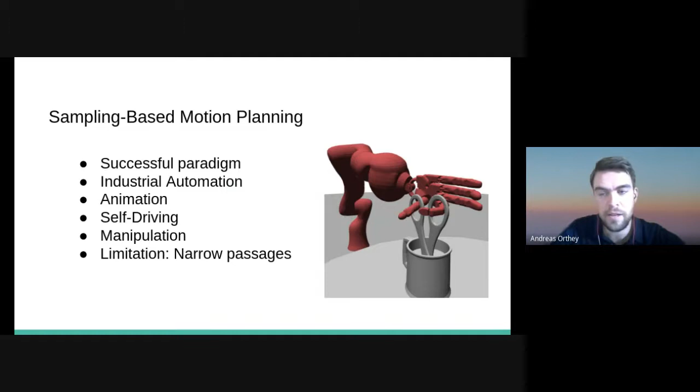However, one of the main limitations of sampling-based methods are narrow passages. Narrow passages are basically low measure regions of the state space which the robot has to move through to solve a particular problem. They are super difficult to solve for sampling-based methods because those low measure regions have, of course, a very low probability of being sampled.

Solving such narrow passage problems is hugely important in a variety of tasks like ingress or egress problems, where we need to either enter or escape from a trapped configuration. It is also important for peg-in-hole problems, where we need to fit an object through a small opening. Finally, it is also important for grasping of intricate objects, for example, when we would like to pick up something like a mug or scissors.

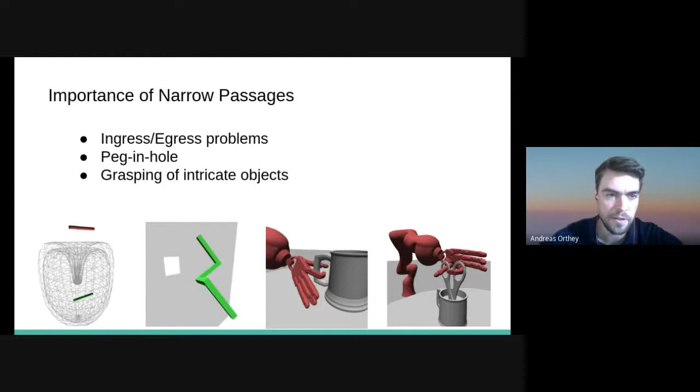In previous works, we showed that you can tackle narrow passages by first relaxing the original problem, which effectively means that we project our high-dimensional state space onto a lower-dimensional state space. We can then solve the problem on the lower-dimensional space and use that information to solve the original problem. One way to do that is by using geometric simplifications, where you, for example, simplify your robot geometry by using a sphere instead of a rigid body, or you remove some of the links from your kinematic chain.

However, while this is highly efficient and can be used to circumvent narrow passages, this approach still often breaks down near more complicated narrow passages. This effectively means that even if you have solved a simplified problem, due to narrow passages you still might not solve the original problem.

To tackle this problem, we devised new tools, which we collectively call section patterns. On a high level, section patterns constitute a mapping which tries to lift a low-dimensional path into a high-dimensional space. This is shown in this graphic, where we depict on the top a high-dimensional space represented by the cylinder, and below a disk representing a lower-dimensional space. Once we solve the lower-dimensional problem, we get a solution path, shown here in green. Our contribution is to lift this path using section patterns into the high-dimensional space.

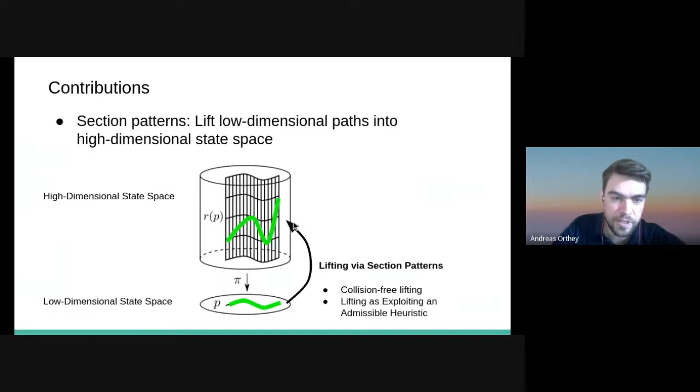This lifting is robust and efficient, and it happens while avoiding collisions and by exploiting the admissible heuristic from the lower-dimensional path. Because this is very important, I will state it again: we see this lifting operation as exploiting admissible heuristics in a continuous domain.

To recall, an admissible heuristic is a lower bound on the cost-to-go to reach a goal region. This means if you solve the problem on a lower-dimensional space, it provides you with an informed lower bound, which we can exploit to efficiently solve the original problem in the high-dimensional state space, which basically means to lift your solution path.

And if we go into the related work, we basically can exploit all the nice literature on admissible heuristics. So the question becomes how you can exploit admissible heuristics, especially in continuous domains. And there are, of course, different tools and techniques. For example, you can use discretization techniques to directly apply optimal algorithms like A star.

You can also use adaptive sampling to either increase or decrease the chance of extending a sample in your search tree. And finally, there are also continuous domain adaptations of A star. And our work is rather complementary in that we concentrate on path heuristics, which are basically an important subclass of heuristics. And concerning those path heuristics, there are actually several important papers on this topic.

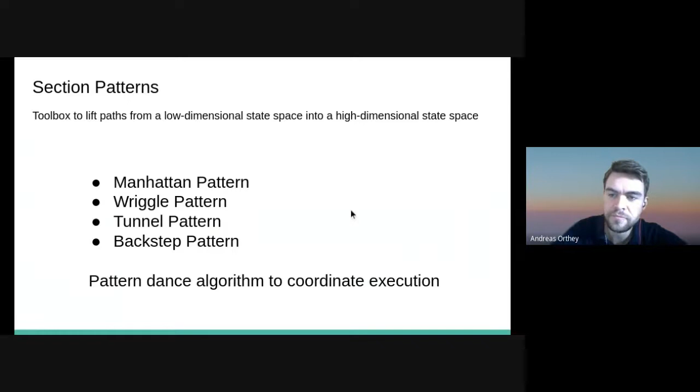With the Manhattan pattern, we interpolate a high-dimensional path, but we do that by actuating the least amount of joints during interpolation. And the reasoning here is, of course, that less joint actuation means less movement of the robot body, and less movement of the robot body in turn means less swept volume of the robot during execution, and a lower swept volume means directly that we have less chances for finding collisions. And this chain of reasoning was basically first expressed by a nice paper from Cortes in 2008.

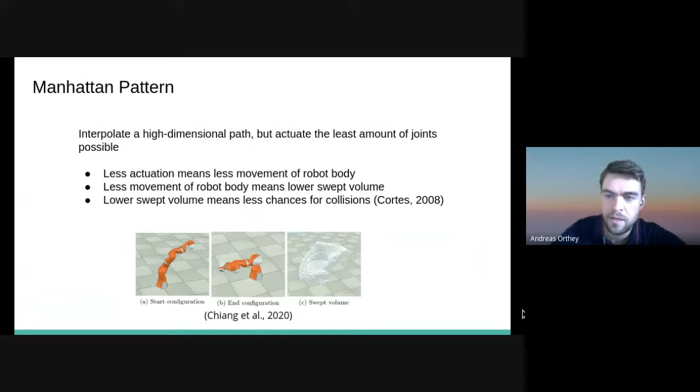And the second pattern is the wriggle pattern, where we basically do coordinated random walk steps to improve our path locally. The motivation for this pattern comes, of course, from the way we often try to open, for example, a door by just trying to wriggle the key forward. And the wriggle pattern is basically our attempt to formalize this motion primitive in a more mathematical way.

And very similar to this wriggle pattern is the tunnel pattern, where we do not do a wriggle motion, but we execute a small sidestep motion, which basically means that we move the keys sideways. And when we visualize this in joint space, we often see that this actually helps us to circumvent small infeasible regions.

And finally, we have the backstep pattern, which we only execute when we are fairly certain that we are trapped in a dead end. An example would be a dog with a stick, which cannot move through a tight opening because the stick is blocking the way forward, as you can see here on the left. And here the dog would have to make this cognitive leap of stepping back, turning, and then trying it again, like on the second video here. And we model this motion again mathematically, which allows us to make a coordinated back step to actually move forward.

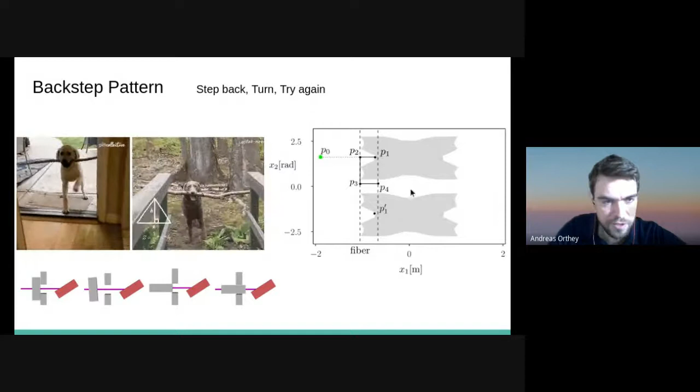And this is just something which works pretty well due to the nature of narrow passages, which often actually have small cavities in state space, which we have to escape from. And this is visible, for example, on the right, which shows a slice through the configuration space of a small rectangular robot near a narrow passage, which is shown here on the bottom of the page. And this figure here on the right shows several cavities in which we could actually get stuck when we move forward, and this backstep pattern helps us to actually avoid that.

And finally, we of course need an algorithm which can coordinate all those patterns in a meaningful way. And for that, we developed the pattern dance algorithm, which basically starts applying the least computationally demanding pattern. And if that doesn't work, it would successively try out more and more demanding patterns until we find a feasible lifting or until we reach a termination criterion.

So in super simplified pseudocode, this would basically be a loop in which we check if one of the patterns successfully solves the problem. And so we basically just iterate over all of them, and we terminate once the termination criterion is reached.

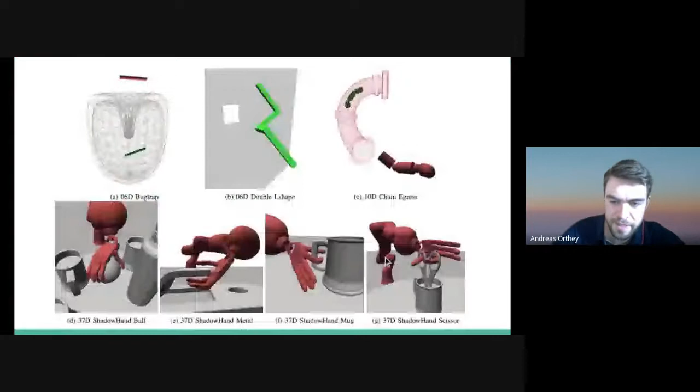So finally, let me come to the evaluation. We evaluated our method on several challenging narrow passage problems, like the bug trap on the top left, a double L shape, which has to fit through a small opening, a kinematic chain where we have to escape from a trap configuration, and of course, a generation of grasp poses using the Shadow Hand robot, which has 37 degrees of freedom, and which we evaluate on 4 challenging grasp poses, which have to be reached from an upright position of the robot.

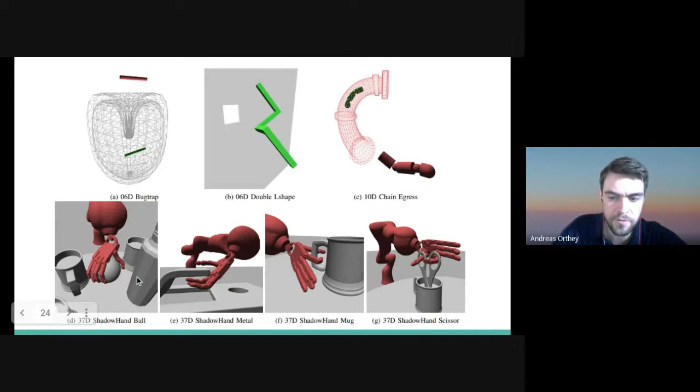And to make a really comprehensive evaluation, we try to benchmark this method against all planners in the Open Motion Planning Library. And at the time of doing the benchmark, there were 36 planners implemented apart from ours. We then use the section pattern inside of our algorithms to compare against all the other 36 algorithms.

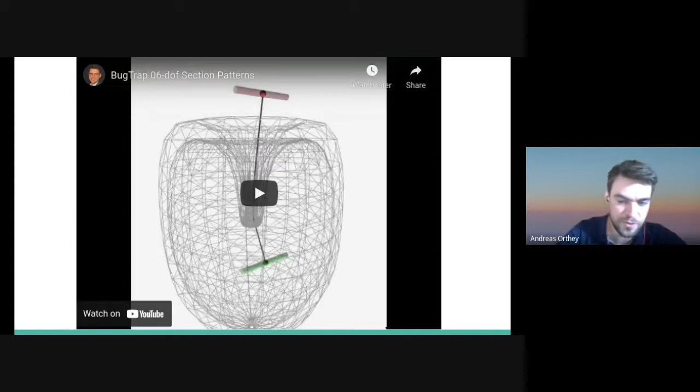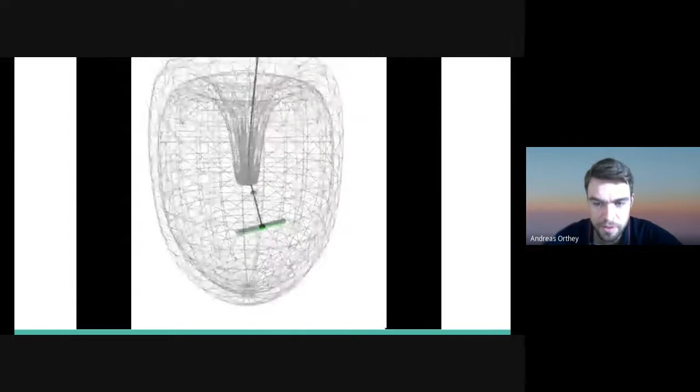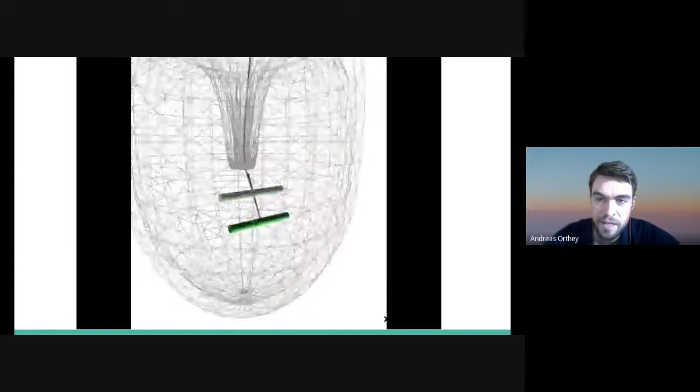The first video shows the solution to a bug trap problem, where we need to escape from a trap using a cylindrical robot. We first find a solution to a small sphere inscribed in the robot. And once the solution is found, we then lift this path using our method to the higher dimensional state space, and this produces the solution to the whole problem. And you can see here that during the execution, we also executed the backstep pattern to actually enter the narrow passage.

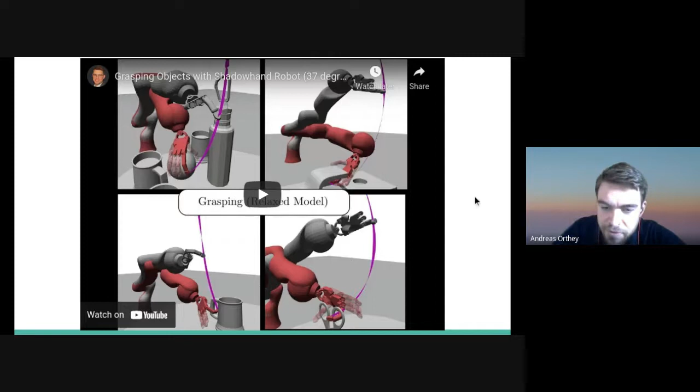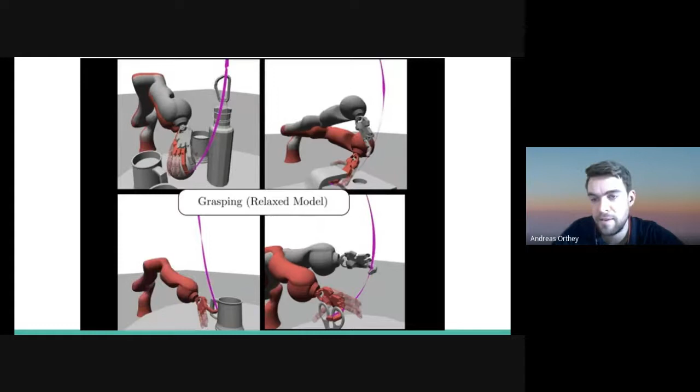The second video shows the steps to find solutions to the grasp poses. We again quickly search for a simplified solution path, which is shown here. And once those paths are produced, we again use our methods to lift those paths up into the high dimensional state space of the complete robot. And you can see here basically the execution of the whole trajectory paths.

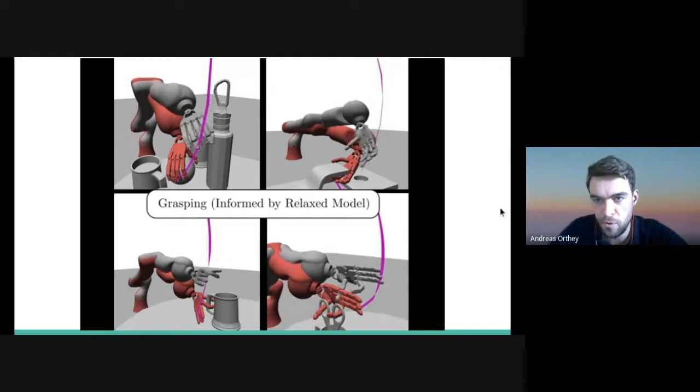And in conclusion, we presented section patterns as a toolbox to lift paths from a lower dimensional space to a higher dimensional space. And we did this by exploiting the admissible heuristic given by a low dimensional path through patterns like the Manhattan, wriggle, tunnel, or backstep pattern. And in our evaluations, we found that this approach actually improves planning runtime by 1 to 2 orders of magnitude, which significantly speeds up planning when narrow passages are present.

And while this works pretty well for the problems we considered, we believe this approach could also be useful to further probe and understand high-dimensional state spaces, which would allow us to scale sampling-based motion planning techniques to even more complicated and complex applications.